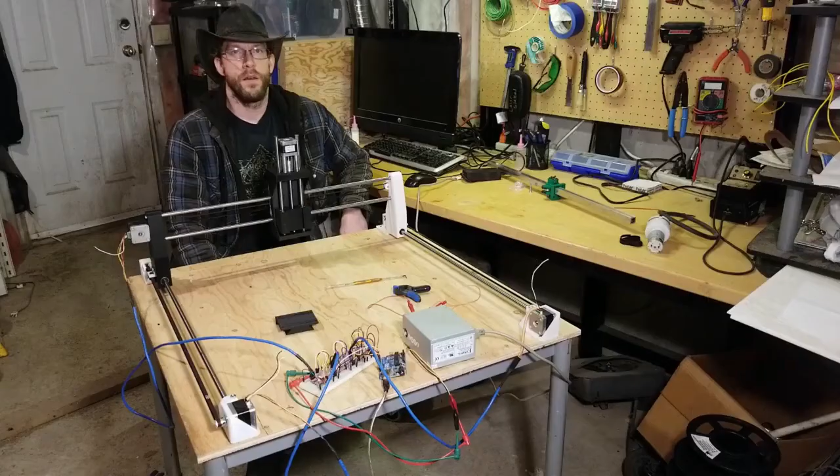I just wanted to show my new CNC motion platform that I've been working on. It's mostly 3D printed parts, and it's all my design. I'm using standard NEMA 17 stepper motors to do all the motion. I'm using Grbl on an Arduino Uno to do all the motion control.

In the prototype here, I'm using 3 Easy Driver stepper motor drivers to move all the axes, but I'll be switching those out to proper Allegro controllers later on once I get the main board. I've got a quick change tool system here, which just uses a dovetail to slot in tools and anchor them here so that we can change out what we want to do.

And ideally what I want to be able to do with this is laser cutting and engraving. I want to be able to do vinyl cutting, light CNC milling like PCB engraving or really light aluminum engraving, and anything else I can really think of to automate with a CNC motion platform. The sky's the limit once you have a Cartesian system like this actually working.

The biggest problem I'm having right now is rigidity. These 10mm rails I'm using on these LM10UU bearings, they're just not rigid enough. I shouldn't be able to wiggle this. This won't survive any significant kind of tool pressure. And in fact, even moving on the y-axis, it actually wiggles around if I don't have the acceleration set just right. So that's where this comes in.

This is my new rail system. This here is one that I've been working on. It's based on 3/4 inch aluminum square rail, which is cheaply available, and standard 608 skateboard bearings. The cool thing about this is this here is just 1/2 of a bearing unit. It's actually 2 pieces. This is just for prototyping.

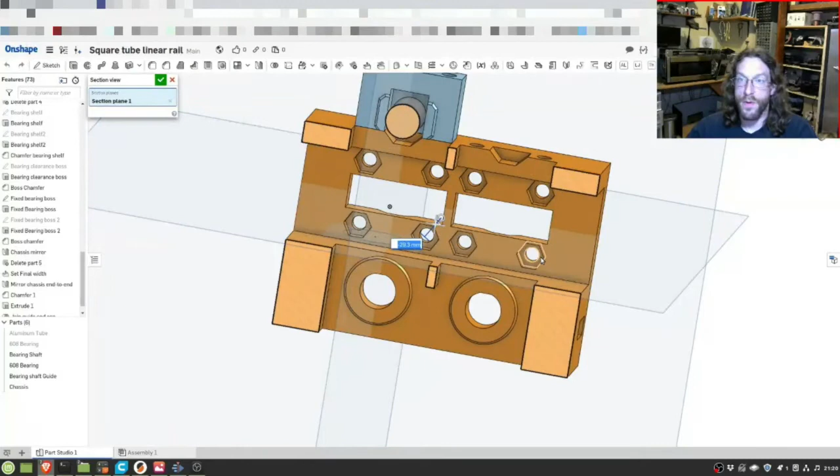Alright, so here we are back in the computer. We're in Onshape, and this is the part. So if we take a look, we can see that the chassis is designed for easy 3D printing, or relatively easy 3D printing for what it is. I'm just going to use the section plane here to take a look. We can see that there are nut holes that are set into the plastic of the chassis so that everything is above the surface of the rail. That way there's no interference.

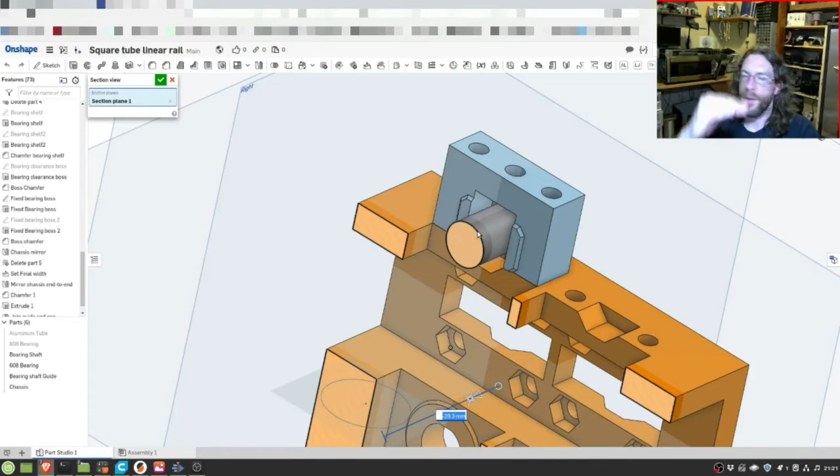On the bearing cap here, we've got a small boss to keep the bearing centered and avoid rubbing on any of these parts. Same thing inside the chassis. Here we've got M3 bolts that actually hold it to the chassis, and here a third M3 bolt is actually what adjusts the bearing up and down in the housing to clamp it onto the rail and take up any slop. And there's a total of 8 608 bearings in this assembly. We've got 2 on top, 2 on the bottom, and 4 on the sides.

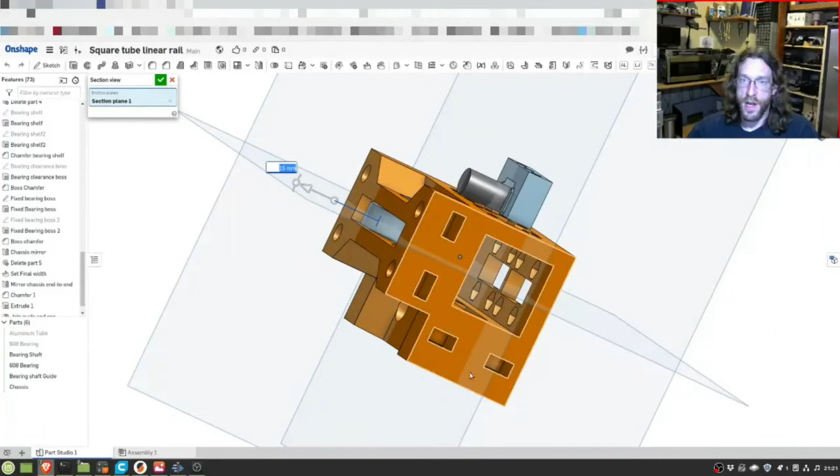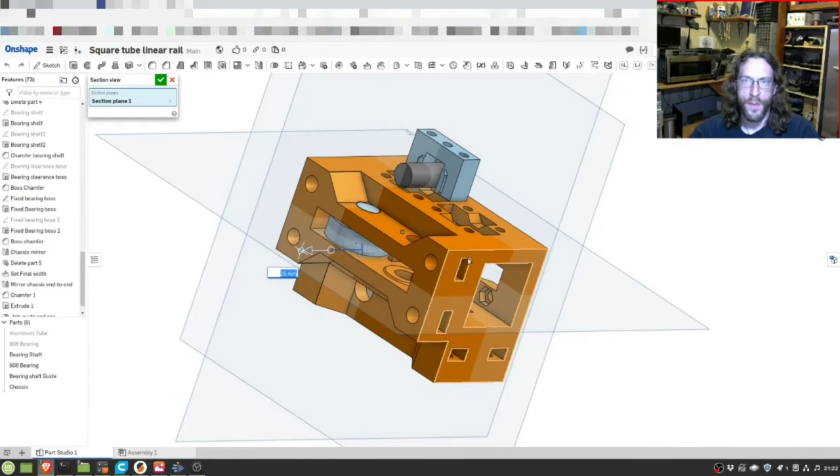And 2 of those are fixed. We've got the side and the bottom fixed, and the top and the other side are adjustable. That allows for use of different size rails. The design is scalable up to 1 inch, 1.5 inch probably. But after that, you'd probably want to add multiple bearings in the stack here to take up more space and have more contact surface area. This is version 3 of the model so far. I'm about to print that and test it, and we'll see how that does.